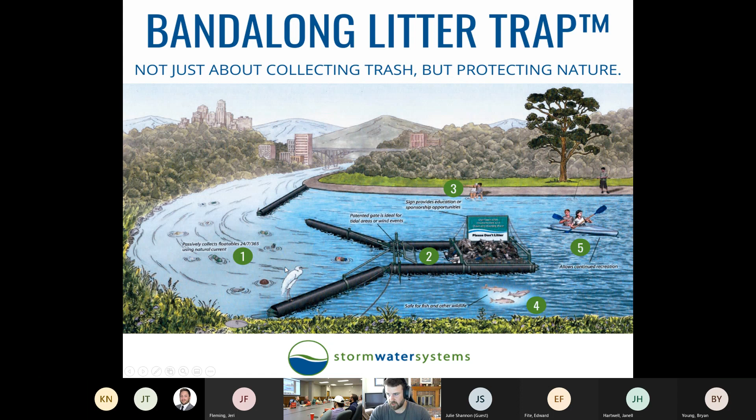Anchoring options, we have a few different anchoring options. The main one being our standard ground anchor, which is a 12-inch diameter, 5-foot deep rebar reinforced concrete plug, is what I call it basically. We pour all of those, and the traps do have a specific velocity range at which they work best.

That's typically anywhere around about 1 foot per second up to 9 feet per second. That's linear surface velocity, not cubic feet per second. That's just for your standard 1 to 2 inches of rain. I'm not saying for these 100-year events that you have to find a channel that's 1 to 9 feet per second in a 200 or 300-year event. That doesn't happen usually. So all we're looking for with this velocity range is just for your standard rainfalls.

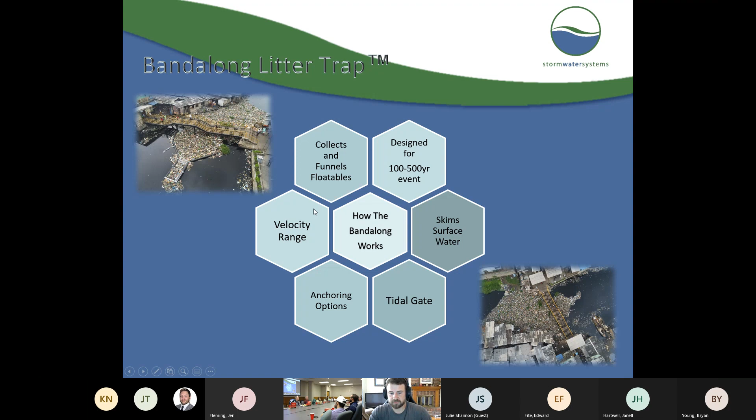What is it made out of? It's made entirely out of corrosion resistant materials. We have our partner in stormwater systems — these traps originated in Australia, a company called Bandalong International.

We partnered with them back in 2006, and before that, they had been installing these units for about 15 years or so before we picked them up. So they have some units that have been in for now close to 30 years on some of their large rivers down there. And our longest one's been in since 2008.

That just goes to show the materials make a big difference when it comes to installing something in a channel that takes the sort of abuse these traps can. But again, all of the green you see is the powder coated aluminum. We powder coat them as a theft deterrent.

Our first trap back in 2008 was in Washington, D.C., in one of the national parks. When we arrived on site that morning, we were installing it just in front of a bridge with a couple of box culverts. In one of the box culverts, somebody had just recently robbed a bank and threw the money bag down there, and there was police tape and all that sort of stuff out there. We thought that if we put this shiny aluminum out there, right around the height of the recession of 2008, 2009, the trap would get cut up and sold for scrap.

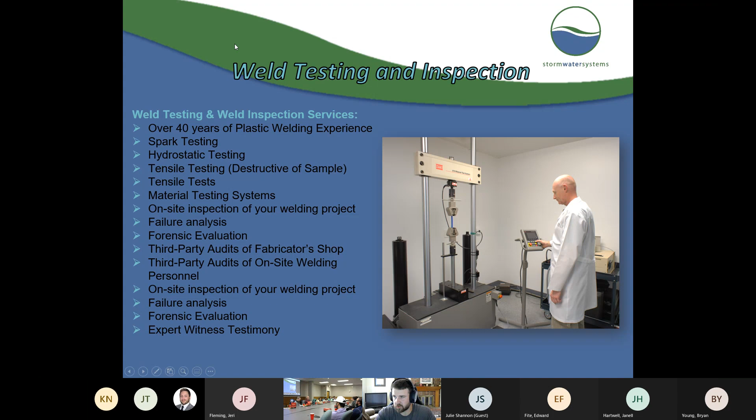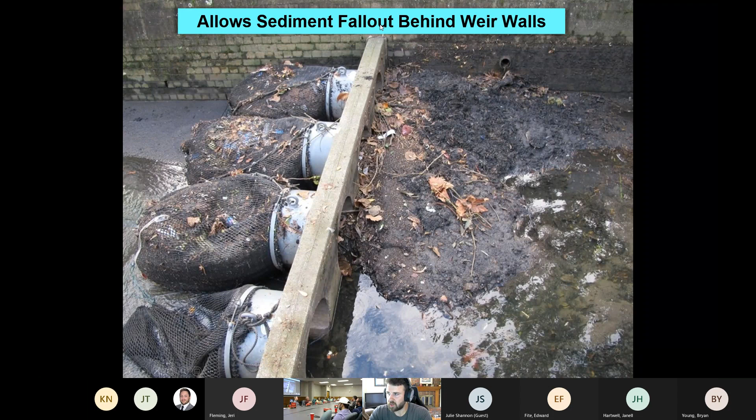Again, this helps assist with sediment fallout. This will be common with these types of units in the weir wall configuration. This structure right here was actually created specifically for sediment fallout, so all the sediment comes over and falls out in this area. They back their trucks down, scoop it all out, and have our StormX here on the end to capture any of the floating debris that got by.

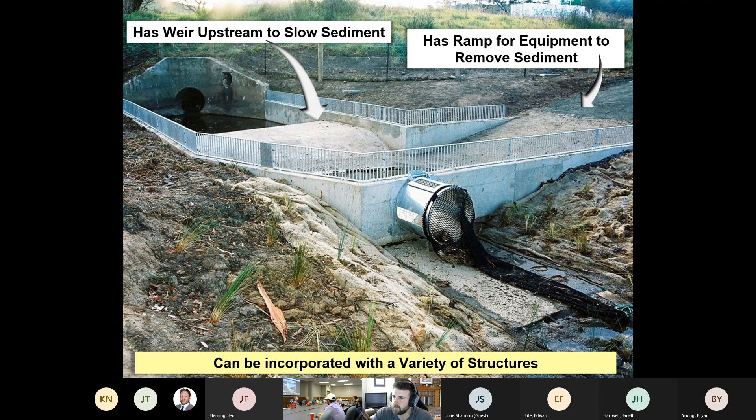States like California have outfall requirements that require a 100% capture rate, so we do have the full capture unit, and they work great. They will capture any and everything that comes down the channel. The only thing you have to worry about now is it's more of a maintenance item.

So regardless of the weather, if you've had consecutive days of rain and this bag gets full, somebody has to go down and maintain it, because even though they have vents on the top, bottom, left, and right sides, they can clog—especially if it gets completely full, it can clog up the whole mouth and flood out whatever is at the other end of the pipe. Thankfully, we haven't had to deal with any of those issues.

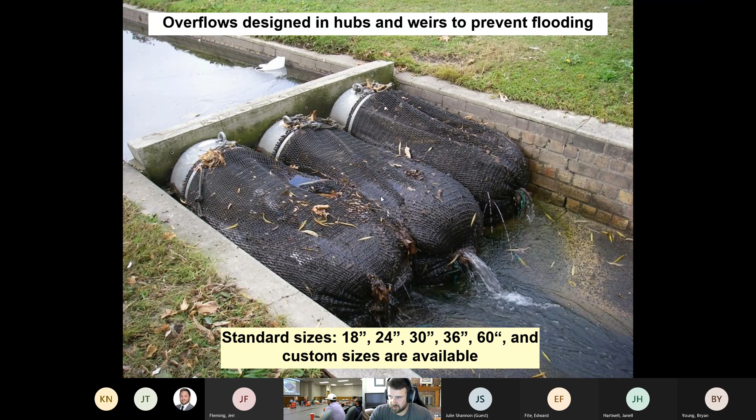The unit you see down here on the bottom is just a custom unit. We can adapt them to a huge variety of structures. We've built several models with these weir gates, and several weir walls similar to this unit here. We've used stainless steel bar grating instead of concrete, so it's just a variety of different ways that these can be attached.

The story behind the next couple pictures here, this is in St. Louis. Just downstream from here, where you can't see, the locals have what they consider a pristine lake. They knew about the inevitable amount of trash that comes off of Walmart parking lots, and they didn't want that trash getting into their lake. So of course they fought the city over getting this Walmart built. Of course, Walmart won—they got their way.

But what they did is decide to install 3 StormXs—I want to say it was a 48, a 36, and an 18. These 2 guys installed them while this other guy just stood and watched the whole time. It only took them about an hour and a half.

All of these StormXs are typically very easy to install, especially if you're going directly into concrete. They simply slide into the mouth of the pipe and bolt in place. We can either bolt them from the inside, or they can be bolted from the outside, depending on the size of the pipe. Usually if it's a smaller diameter pipe, you can't really get a hammer drill on the inside of it, so we'd have to go from the outside in. We do have different options for that.

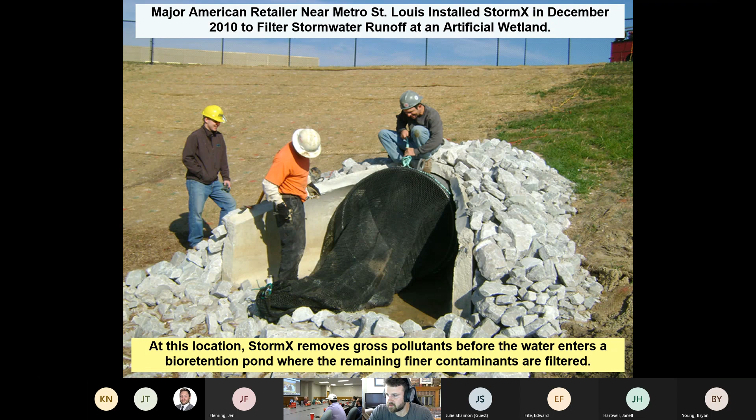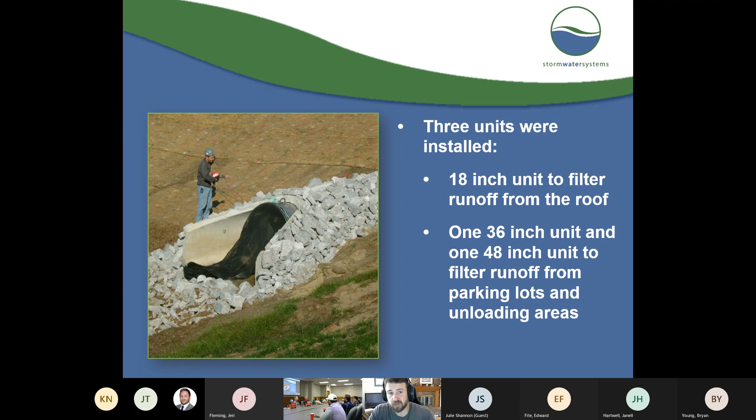I think this was the 48, and this was the 18. And I think that was either another picture of the 48 or the 36. Again, those 2 guys installed all 3 of these units in about an hour and a half, so they are very, very easy to install. It just requires basically a hammer drill and standard concrete bolts, and that's it.

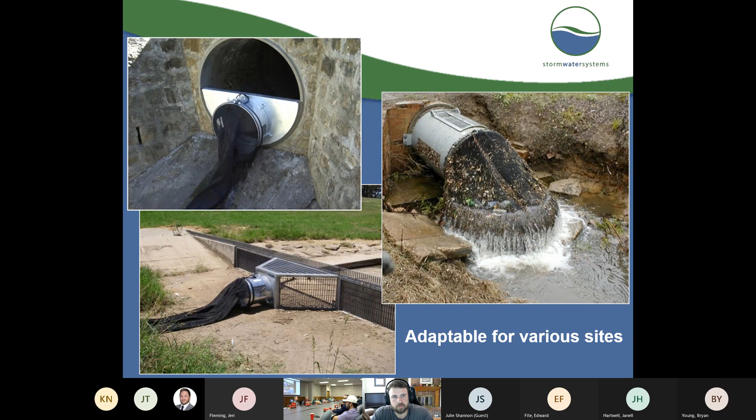Ballpark, what is the cost of doing the Bandalong? We have one question, what's the ballpark price for the Bandalong? So for, oh, the Bandit. I'm sorry, I misunderstood. No problem. I can just give you a price range for all of them, just so you have a reference.

So for the Bandits, these typically start at about 30 to 35,000, and that price includes us sending one of our technicians out to assist your crew with installation. If you were to purchase any subsequent traps, we could take out the cost of the technician coming out, so it would be a little bit less. But about 30 to 35 is what we've seen, simply because a lot of your cost is going to be boom length. Most of these channels are pretty standard, between about 20 to 30 feet wide, and they require about the same amount of boom. That's pretty much the range for the handful we've installed here lately.

The Bandalongs have a huge range because we have 3 different sizes. For the small size you're looking at here, these typically start at about 165,000, and that includes installation, trap, delivery, everything. It's not uncommon for us to have to come out a time or two after a couple of rain events, because you never really know how the trap is going to sit until it's been through a few events. So we commonly come out and do some tweaks to the cables, the booms, whatever it may be, and all of that's factored into the cost, so we can make sure it's set right and you're happy with it. That ranges from about 165 up to 300 plus for our larger size traps, but again, a lot of your cost is going to be booms, so the smaller the channel, the less it'll be.

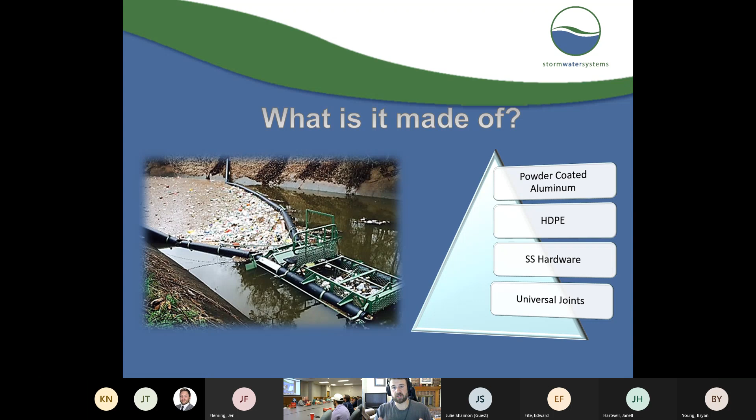Can the Bandit sit on a dry bed for an extended period of time, like in a drought condition? Yes, actually the Bandalong, again, these originated in Australia, and they were built to sit in dry creek and channel beds for pretty much the majority of the year. They have what we call a sacrificial runner along the bottom of the boom, basically about 1.5 inches of HDPE that can just sit on the dirt or rocks, whatever it may be. The same thing carried over to the Bandit when we designed it, it has the same runners on the bottom, so it does not hurt it whatsoever to sit in dry channels. One of our installs down in Savannah, Georgia, is in a tidally influenced channel, and for half the day it sits in a completely dry channel until the tide comes in.

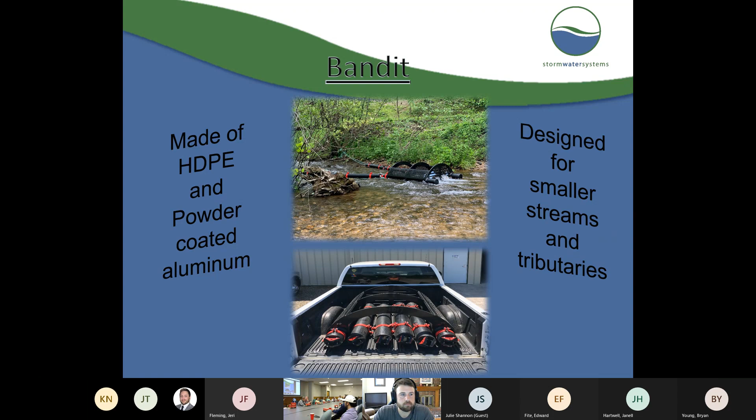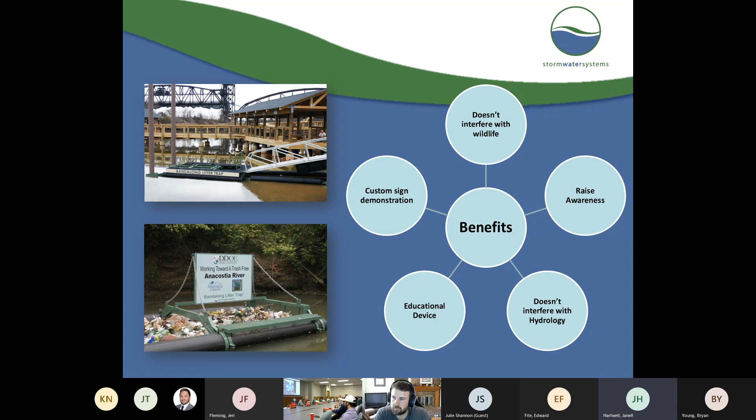I don't know, let me see if I could find it.

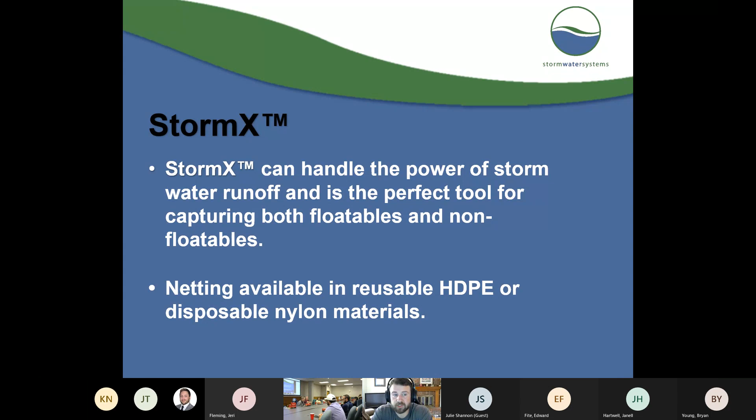Okay, sorry, we lost you for just a minute there, Dustin. Our internet went down briefly. Okay, what did you not hear? What is the last thing you heard? Yeah, just the tail end.

Gotcha. So I was talking about the maintenance of the units and maintenance schedules. For all the StormX, the Bandits, and the Bandalongs, we recommend they be checked after every significant rain event of 1 inch or more. That doesn't necessarily mean you're going to be cleaning it out every time it rains, but they at least need to be checked because you'll get varying amounts of trash after each rain event. What we've commonly seen is our customers will, at some parts of the year, be cleaning it out one time a week, and other times of the year it could be every other week or every third week. Some customers in areas that don't get a lot of rain may only clean it out once or twice a month, but in other parts where they get a lot of rain, they'll be cleaning it out more. It really just depends on where you're at and the types of debris you get. After a few months, customers will understand the debris loads they're getting and can schedule a lot better when they're going to clean it out.

All right, thank you, Dustin. Sure.

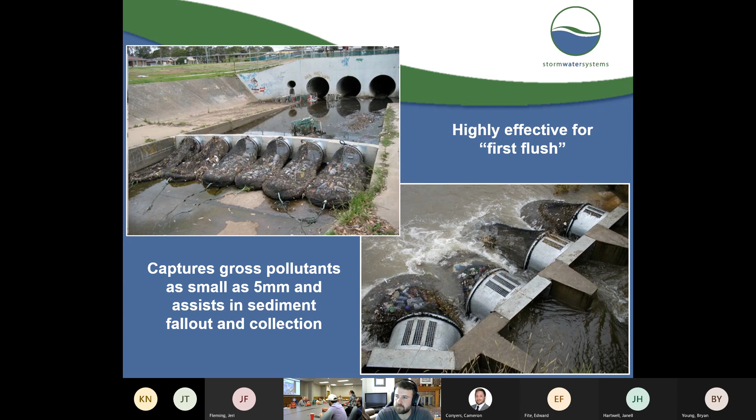All right, any other questions online or in person? I think we've got some crickets, so.